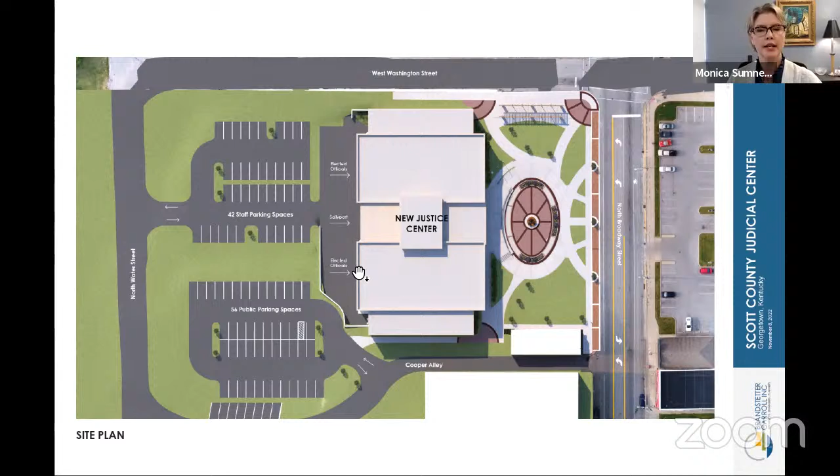One thing I noticed, which I think is just an oversight, is there's not a door from the right-hand elected officials parking into that hallway. On the other side, it's right there. On the other side, the other. Yes, correct. Gotcha, sorry, thank you. No, it's not a problem, there would be a door that mirrors the other side right into that staff hallway.

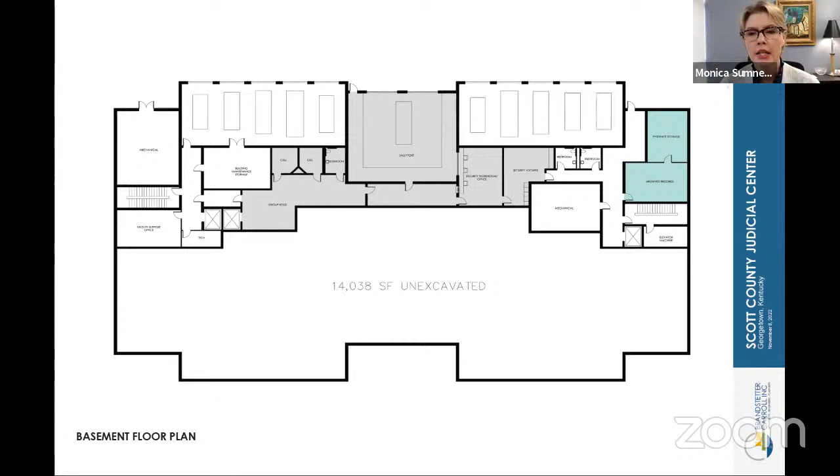And then the building is kind of divided into halves, which we'll see when we go to the first floor. So we have stairs on both sides of the building for staff.

So Jennifer, point to the right-hand staff stairway. That's a staff stair and elevator. And then over on the other side of the building is a staff stair and elevator. So we have two banks of parking that are directly underneath their appropriate courtrooms, and they come on up through the building that way.

Okay, so let's enter the front door, and I'm just going to continue to ask Jennifer to move her hand. So we have two entrance doors in the front just to get people into the two security checkpoints, so during busy times we can get people in. That little gray area is just circulation space or security space that is accounted for on the other document.

So straight ahead from the security checkpoint, folks can find the stair in the middle, or over to the right, a bank of elevators.

The clerk is in the green area, so people can easily find them to the right of entering in. We have a counter, all the workstations, records review, records, all of the things that we've worked through with Ms. Foster.

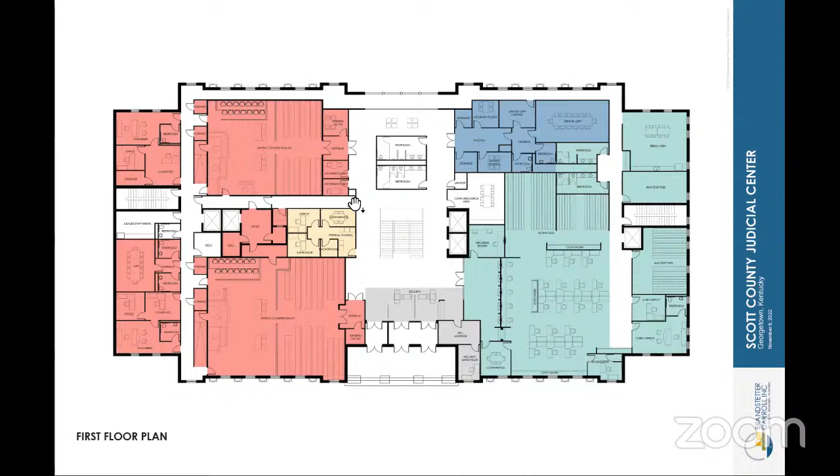Oh, no, I'm sorry. That is okay, I only have the allocated program in my hand, not the, okay. No, you're fine, let's take a look at the screen here together.

Thank you, I'm struggling, I apologize. This is one of those times where these are really handy meetings. I know they're a lot harder to schedule in person, but these do go really well in person too. We've been struggling also with just. Yeah, I know you have, Monica. Thank you, to get it across clearly is a struggle. It does, it makes it harder for you guys, so we appreciate it. To Zoom at all? Oh, we could Zoom it. Does that help everyone? Yes. Okay, because you never know what other people's equipment is like, if you're trying to do it on an iPad or a large screen. So there, thank you, Jennifer.

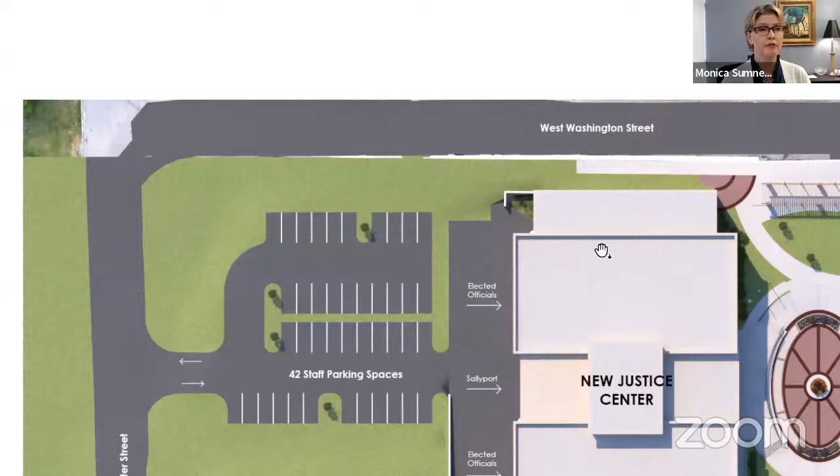Okay, good. Let's continue back to the first floor. We may have to zoom out just a tiny bit. Now let's zoom in. That seems good, we can move around a little bit. Okay, so here we're back to the first floor.

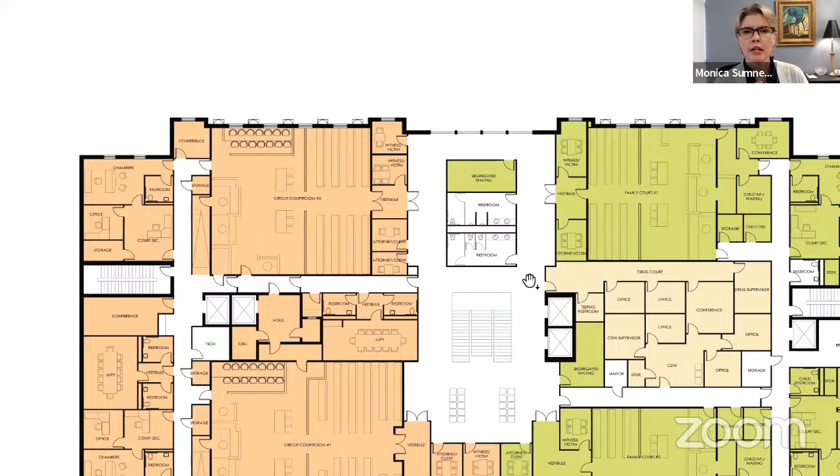Jennifer will find her place here. Whoa, we jumped right to the second floor. Sorry guys. The only area I really didn't point out on this first floor plan is the blue area to the back right, and that is the grand jury suite.

Jennifer, come back over, let's point out the staff circulation. So all of that is our private staff circulation pattern that flanks the building all the way around, so the clerk, judges, and staff can move about freely getting their job done without intersecting the path with the public or the in-custody.

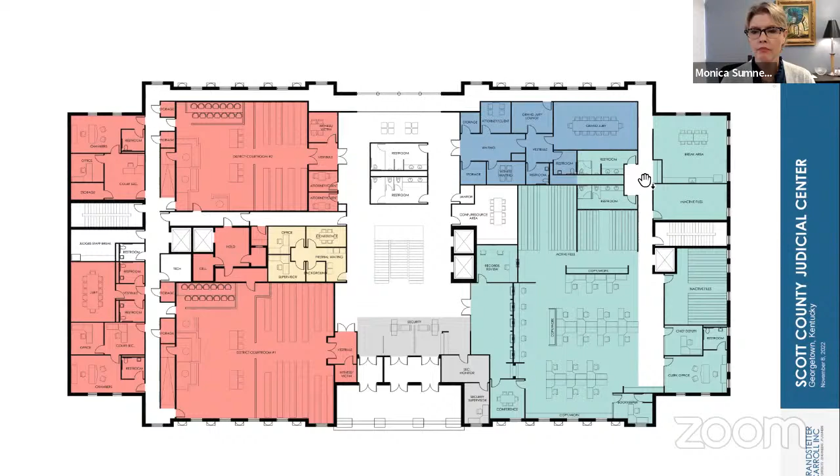All right, let's go ahead and look at that second floor. Here's the second floor plan. Wow, these colors are really bright on my screen.

So again we have banks of 2 courtrooms, where on the first floor we have the pink courtrooms, stacking above are these tan colored ones, and that is the circuit court. The circuit courtrooms are on the left with jury quarters and holding in the middle. Then to the back, or the left, we have another jury room, because circuit court wanted to maintain 2 jury rooms, and then the accompanying chambers for each courtroom.

Over on the right-hand side of the building, which would be above the clerk and the grand jury, we have family court. The one Jennifer's highlighting now is closer to the authorized size, and the other one is a little bit larger per the request of that judge. Behind those 2 courtrooms, same thing, we have the supporting suites so those chambers can be right behind their bench.

And then in the middle we have statewide services again. We have drug court and CDW with distinct and separate entrance points. Drug court enters in off of the main lobby, and the CDW suite is accessed through a semi-private or controlled corridor flanking family courtroom number 2.

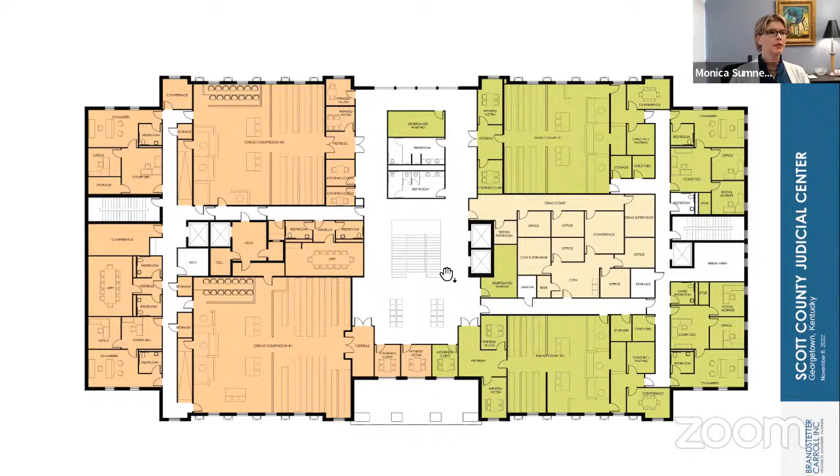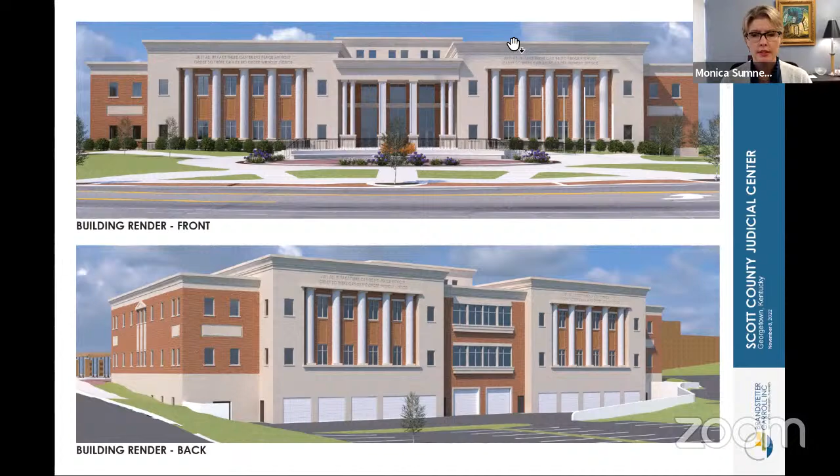You guys see me okay? We do. Thank you, Stevie.

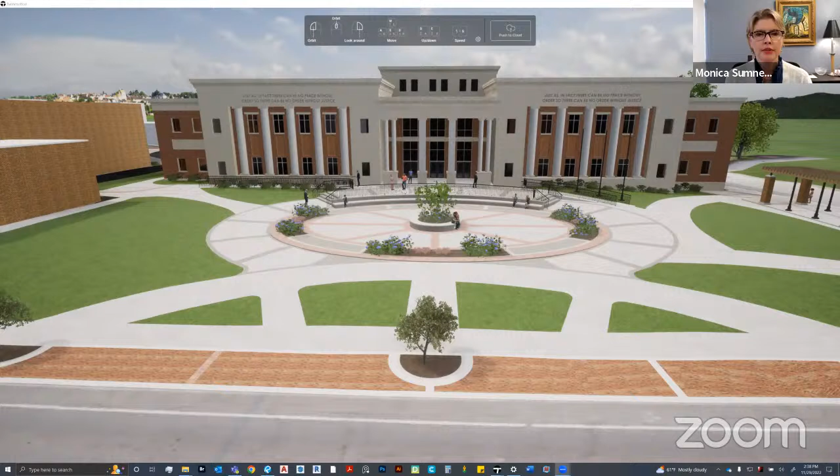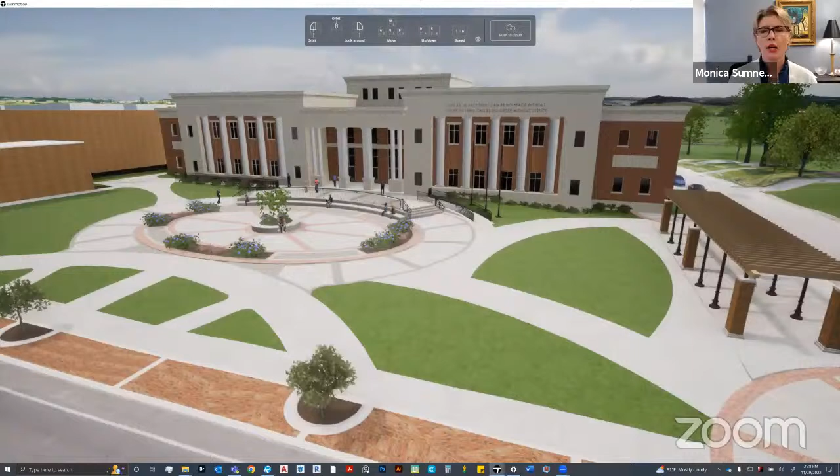So Stevie, you can just start moving slowly and I'll narrate as you move around. Here's a nice view of the public plaza with planting areas and seating and so on, addressing the parking along the street. I'll add that we're probably going to get a little bit of lag and choppiness.

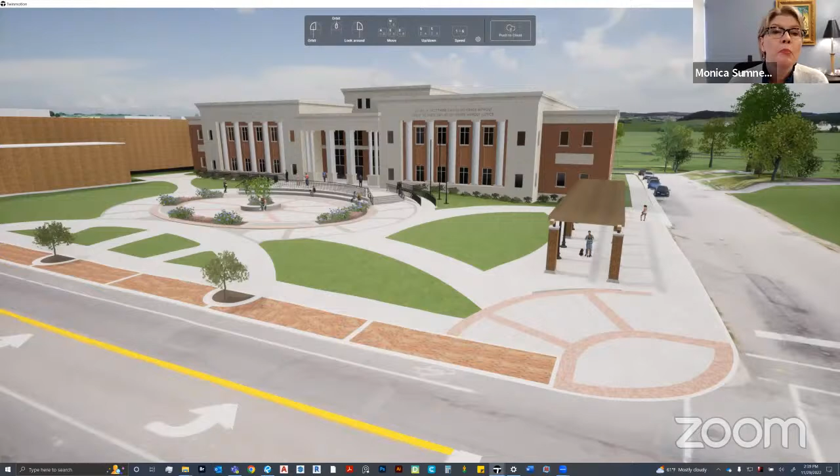Just because of the way we're doing this with Zoom, but we can get a little spin, a little feel of the surroundings of the building and of the site. We can go down the side street and look at the side view. More lag than I would have anticipated. There we go, so you can get a feel here for how the site falls off, which is why we have that partial basement in the back.

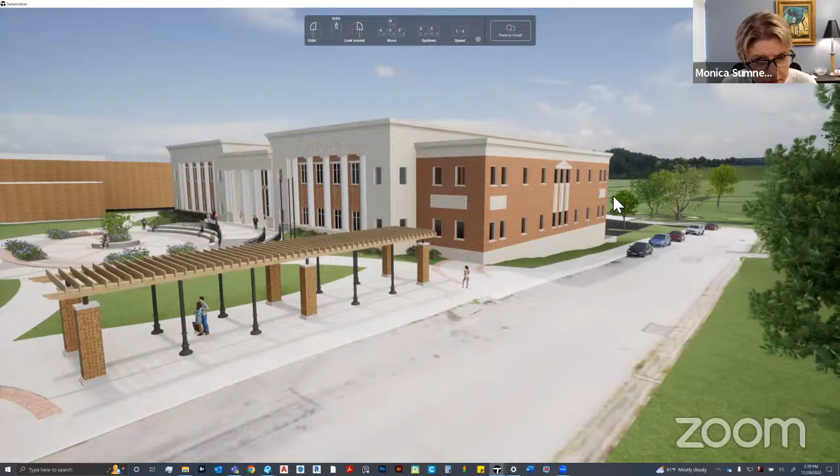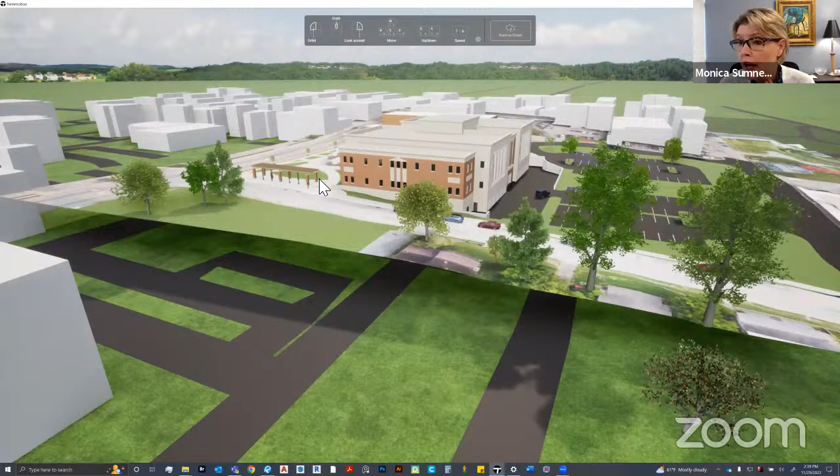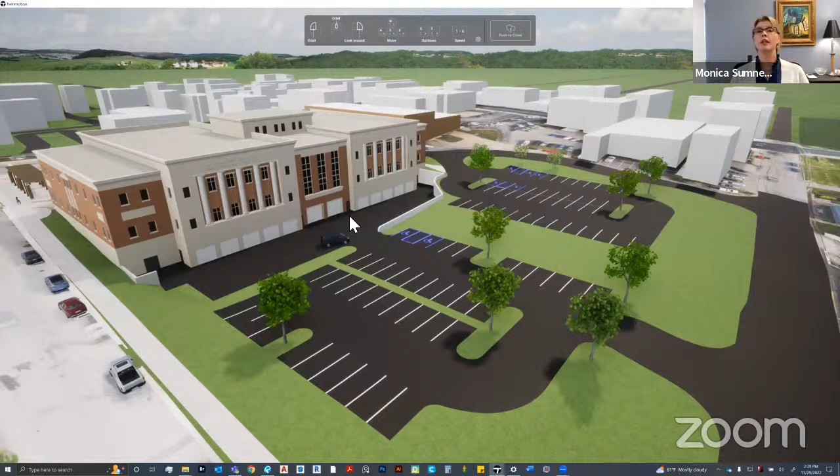So the areas of the building that appear to be taller in the stone, those are where the courtrooms are located, and they do have higher ceilings. The lower side pieces in brick, that's where the offices and chambers are. They can still have a very nice ceiling height, they just don't need to be as tall as the spaces the courtrooms need.

So you can understand how the building is arranged by looking at this building and seeing the tall stone pieces are the courtrooms. You see the garage doors there around back and how they feed into the parking areas. This lower level in the foreground is the staff parking, and the parking lot farther away from us is the public parking.

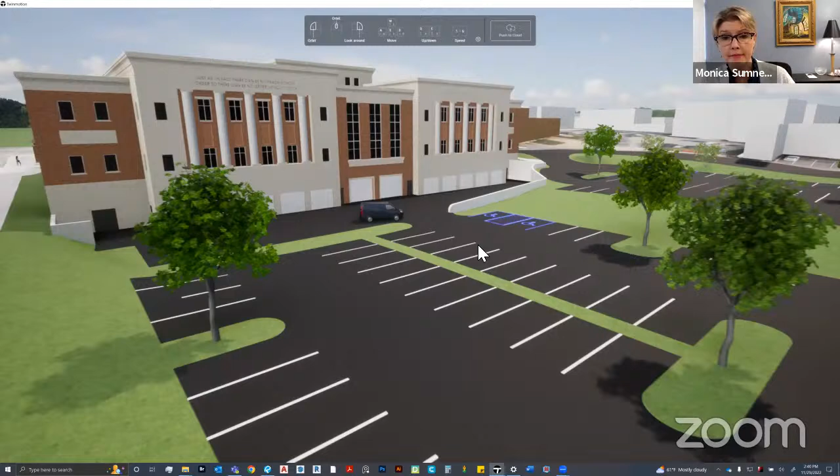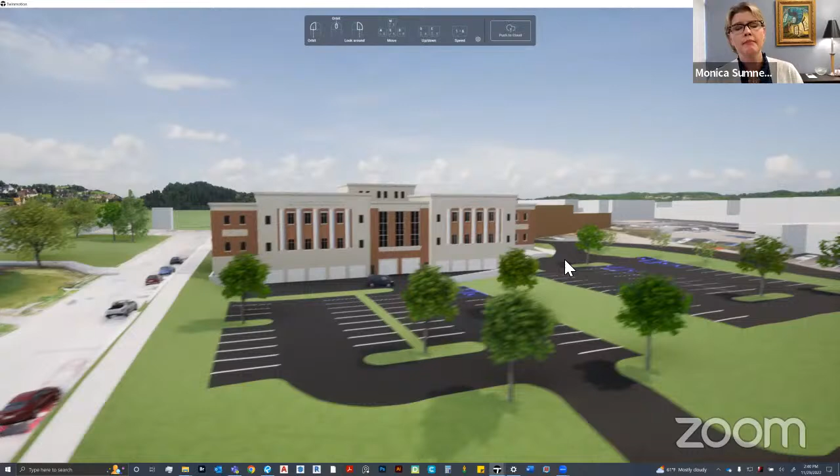The two garage doors in the middle in the brick area, those are Sally Port entrance points. We may go to one door, we may leave it two. We have a few tiny decisions like that yet to be made, but ultimately that's the location of that door or door set. The tall part in the middle of the building with the clusters of windows, the high part, that is over the grand stair in the lobby, so we'll get some natural light down into the central part of the building.

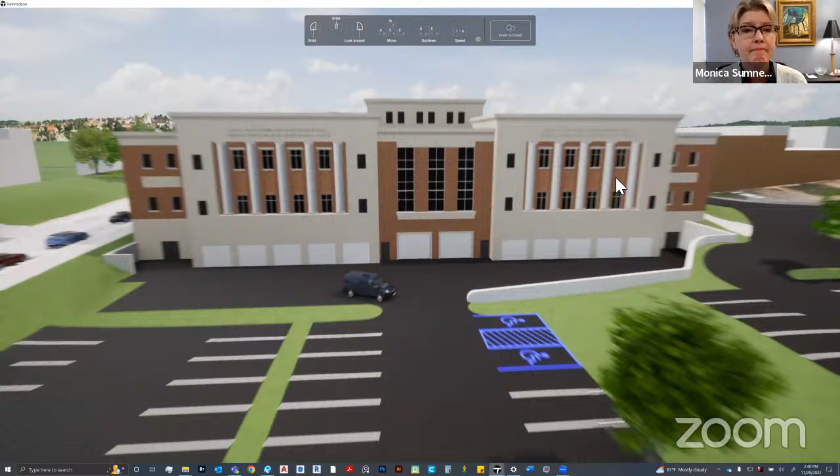All right, and Stevie can just work his way around the other side of the building and land us back at the front. And we can entertain more questions about the building, or we can move on and let the construction manager speak his part.

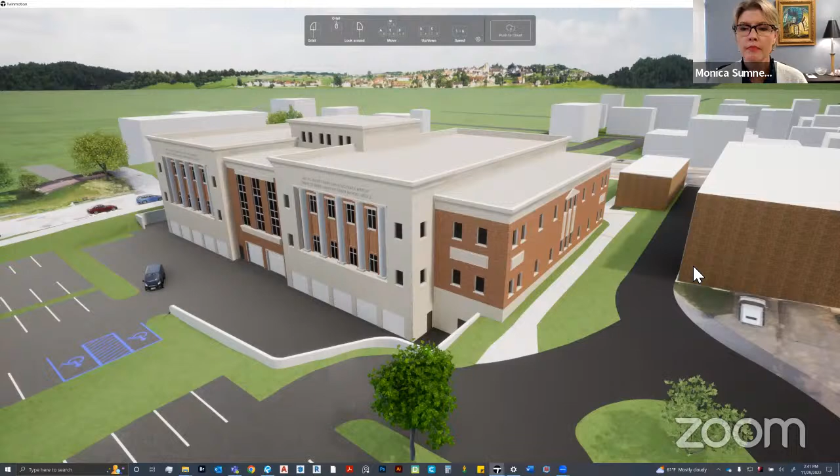I just have a comment. I'm from Scott County, so I'm looking at this with a little bit of additional interest than other people may be. And so I think it's a very nice facility, and I hope it works well for the judges.

Great. I know the project development board is very proud of it, and they want to break ground tomorrow. It's a beautiful facility, and it's a great location too, I think.

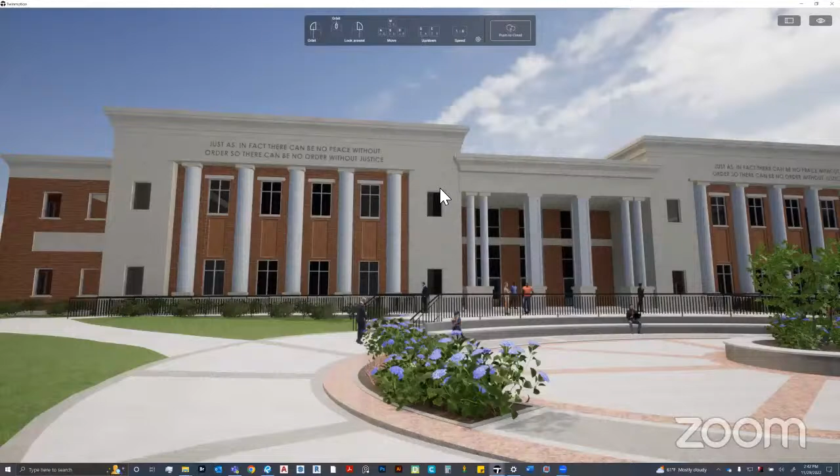And it looks like, and you may have said this and I missed it, is the ADA ramp right there in front of the building? Is that what that is, for the public coming from behind? Yes, it is. Okay.

Where are the closest handicap parking spots? How far are they from the front of the building? So we're actually going to work with the city to get a designated handicap parking space on the street, and there will be an accessible path to the front door from the street.

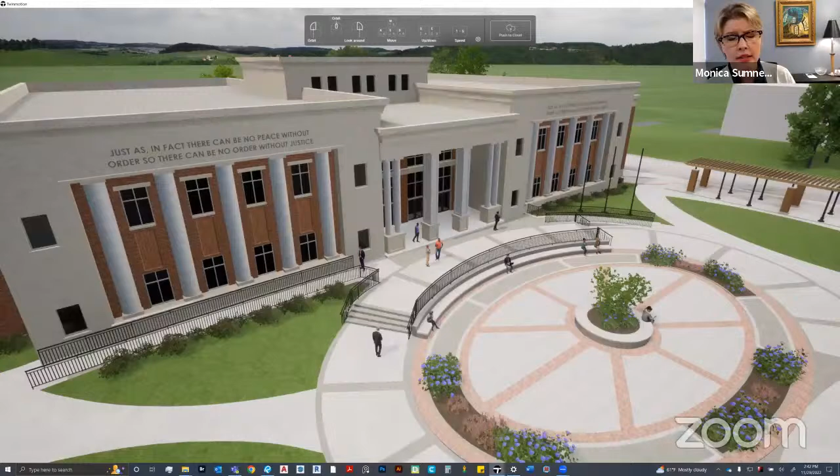But if we look at, Stevie, try to give us a shot of the parking lot in the back if you could, and focus on this left side of the building. We have an accessible path. You see a sidewalk there down the left-hand side. Whoa, I just lost it. There we go.

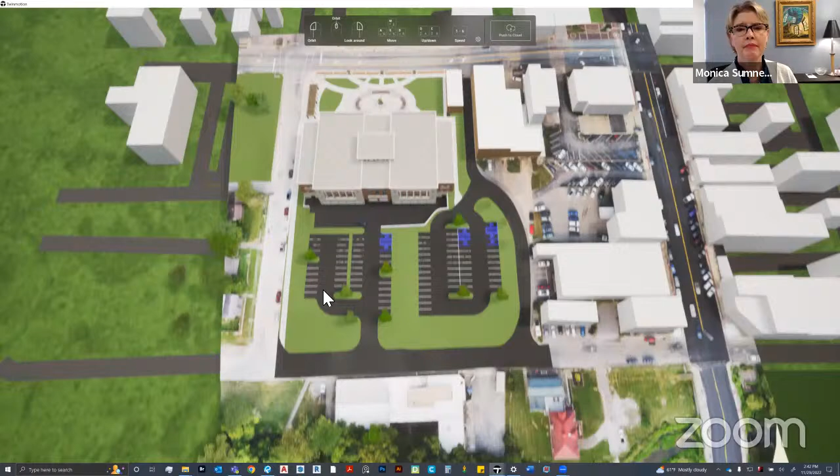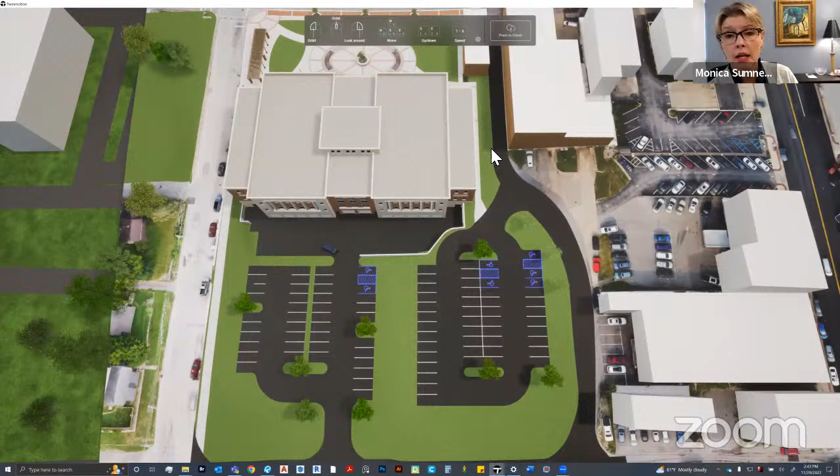All right, so there we go. Yeah, so on the right-hand side of the parking lot, you see the accessible parking spaces noted in blue. And then there's a sidewalk that connects that parking lot all the way around to the front of the building. Now it's not the shortest path, but we've designed the site to where it's nearly flat, so it will be easy to navigate, even though the distance is a bit far. We meet the ADA guidelines with that path.

Thank you. You're welcome.

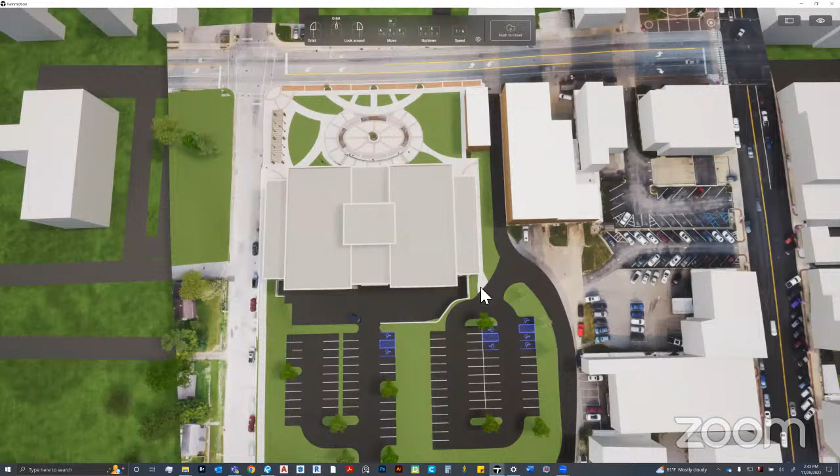So while Stevie has this view on the screen, it's actually a good one. You'll see in the top upper corner of your screen, you get a glimpse of some brick pavers, and that is actually the current Scott County Courthouse. And then the judicial building kind of makes a triangle between the courthouse, this new building, and over across where the big parking lot is.

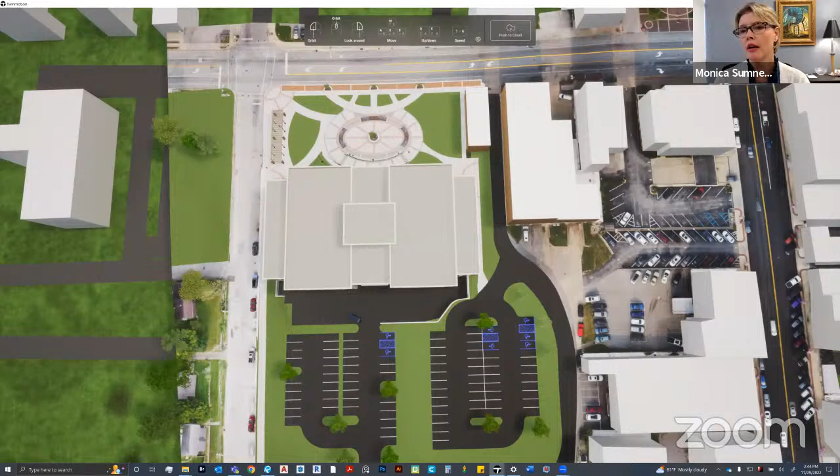So this building is really nicely located in the heart of the city. Not only will it have a good recognizable address, but it's easy to navigate. There's lots of parking around it, easy to walk to from restaurants, if you're there all day and need to run to a sandwich shop, there's plenty of offerings nearby. So it is a very good site for that purpose.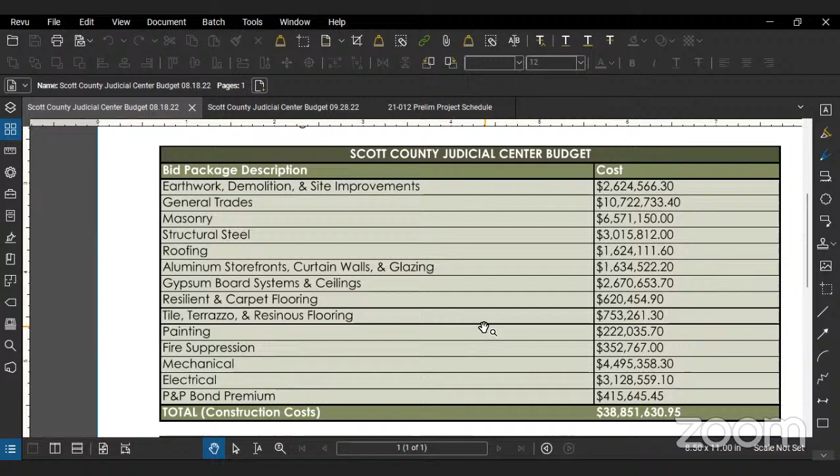Is there any specific questions or comments you'd like to expand on for any of the trades or GMP costs? You know, Josh, this is Lori again. I know that we've got to spend some time talking about this. I know at the last CFSC meeting before these projects were approved, we've been battling just the skyrocketing construction costs, just like everybody else is.

And I didn't know if we need to talk about that here, Danny. I didn't know if you wanted to hold that because the conversation is really the same for both projects. And Josh, I didn't mean to kind of mess you may want to.

Oh, no, no, absolutely, because we have a plan. Yeah, I think it'll be helpful that once we see the proposed plan of finance and related to these costs and what current interest rates are, or what we're seeing projected interest rates, I think it would be good to have that conversation probably then.

Okay, that works. I just wasn't sure what the plan was. Okay, yeah, I know. I believe the biggest concern, along with the market continuing like it has, is the interest rates. So I know that's been a big concern.

Josh, one question I will ask of this related to the total construction cost, which includes the construction management fee. Also, but where are we as far as the total square foot price per square foot related to the square footage that we have on the design?

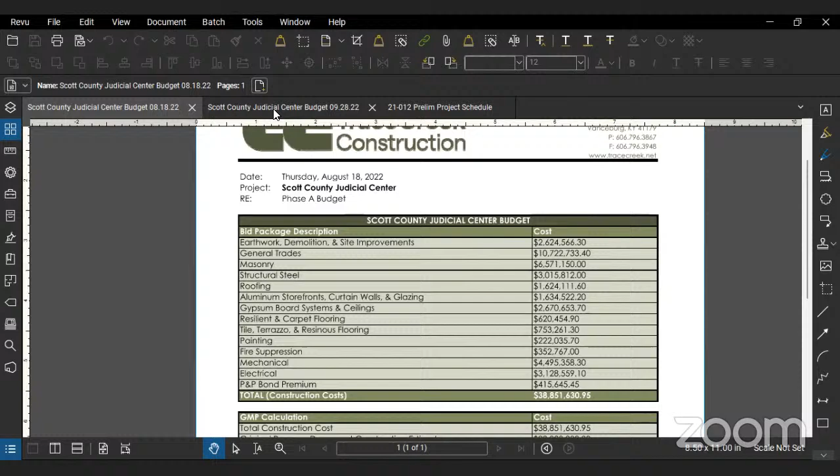Any other questions from the committee? Now we did break out the site demolition package, which we are currently out for bid for. That would be included in the $2.6 million line item for the earthwork and demolition site improvements in the overall budget. It's just broken out of that line item. This would include abatement of the 12 structures that are on all the properties currently, the removal of those, the trees and vegetation, utility cutoffs, and kind of some preliminary grading, along with a post-driven fence, kind of get the site ready and secure until the project keeps moving forward.

So, I do have a question. This is Libby. Is the 10% contingency the traditional contingency? And do you feel like that's sufficient at this point, just seeing how the costs continue to increase? I just wondered if you could speak about that.

Historically, that's what we've tried to run with, is 10%. On this project, we'd be looking at a little over 4 million for any overruns or modifications or changes in work.

So let me try to address this, because Libby, I feel like you're asking the question I'm asking. So when we talk to the financial advisors about the cost overruns and where we are on the use allowance, spoiler alert, I don't think anybody will be surprised, we're going to have to go back to the General Assembly on these. But in terms of a 10% cost overrun, that's really based on whatever the costs are. That's not based on projected material cost increases or labor costs, because we probably need to explain to Libby once it goes out to bid where we are.

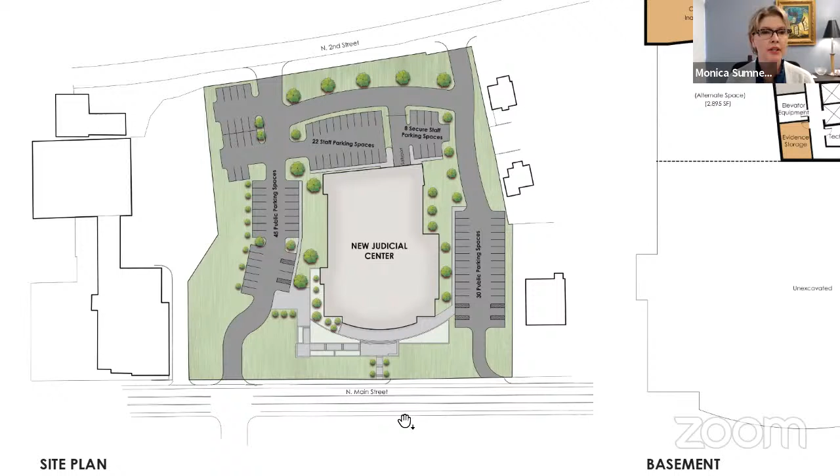All right, this is a site plan. And County Judge Executive West noted how lucky they were to find this property. I support that. To the left of this judicial center, the building on the corner highlighted in dark there, that is a prominent bank in the community right on the corner.

The courthouse is about a block to the left of that, so it's very proximate to diners and attorney's offices and whatnot.

So the Judicial Center is labeled there in the center of your screen. We have 2 entry points onto the site, with public parking flanking the building. We're trying to maintain an appropriate setback and lawn to the front of the building, and we've noted staff parking and secure staff parking spaces in the back.

There's also exit points out to North 2nd Street. So we have excellent site circulation with this property.

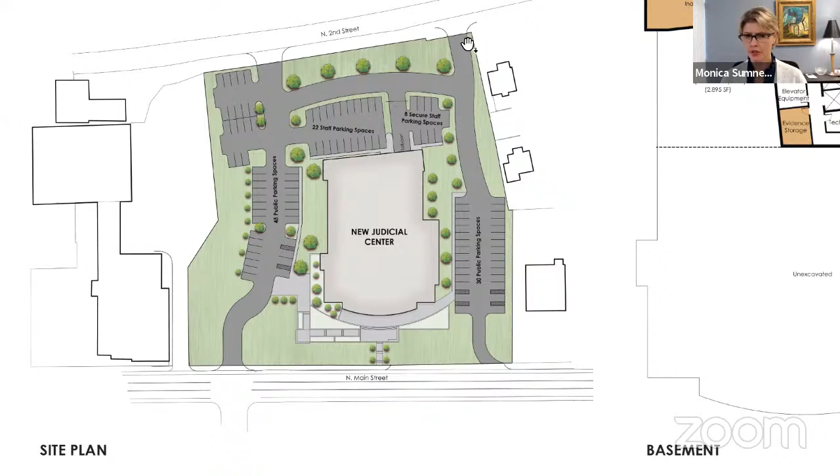We do have a partial basement again because we have rolling landscapes in Kentucky, as you all know, so this site is not flat. In fact, we have a 14-foot fall from the front to the back in height. That allows us to sneak in a sally port and some storage and support spaces underneath the building.

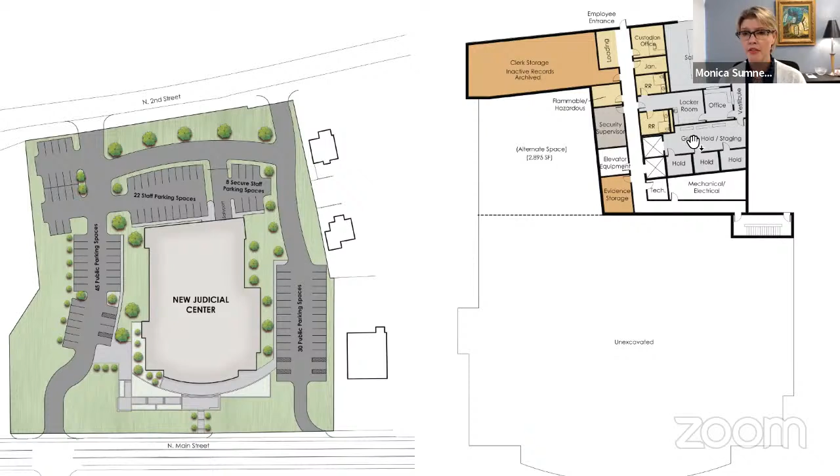The sally port and prisoner holding and handling areas are in the gray colors, and those tan and brown shades are various support spaces, such as storage for the clerk, long-term storage records, custodial offices, various equipment needs, and so on.

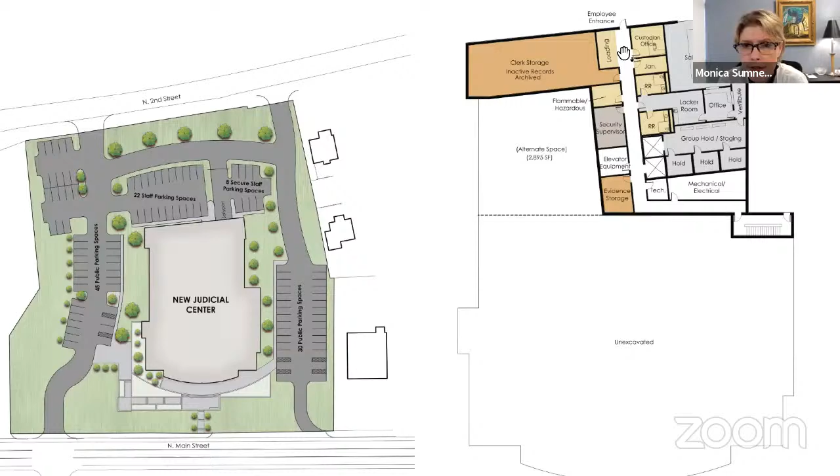It's labeled law enforcement door in the back there, Jennifer, the back corner, right? We do have a place where the staff will enter there and law enforcement personnel can access. And then we have another staff entry point right where the employee entrance is, off that back staff parking lot. So we've got secure entrances in the back, no public entrances back there, all the public entrances in the front. And we'll show you that on the first floor plan next.

All right, let's just get that first floor zoomed in on, Jennifer, if we can. All right, so we have front doors. This plan is kind of long and narrow from top to bottom, so we'll have Jennifer adjust that plan for us as we move through. We have 2 entry doors that she's highlighting with her hand there, and we come into a nice open lobby with a security checkpoint.

Those dash lines represent soffits or elements happening on the ceiling, so they're not really there on the ground plane, but they help form the space. The clerk windows are highlighted in the bronze, dark tan color. We have the record review noted, all the desks and windows that the clerk has asked for. The clerk office is shown over on the right with all of his support staff, records, and so on.

To the very front of the building, just past security, we have our pretrial offices shown right there. And then over to the left on the far end of the lobby, we have our stair that goes up to the 2nd floor. That stair does not access the basement—there's no basement under this part of the building.

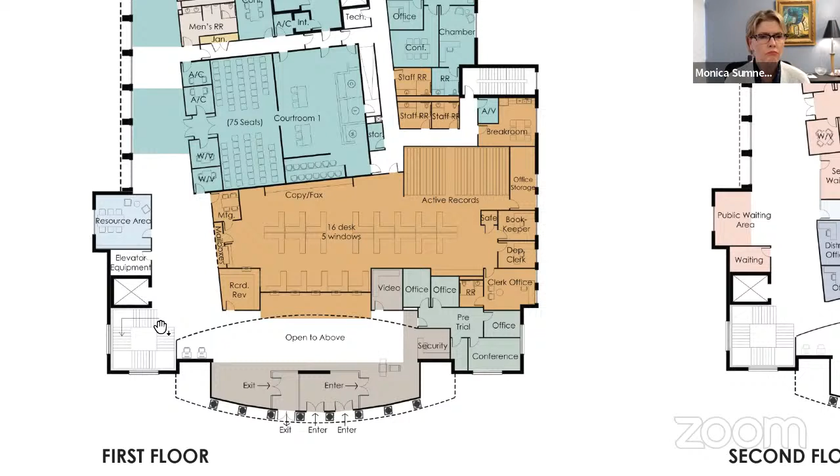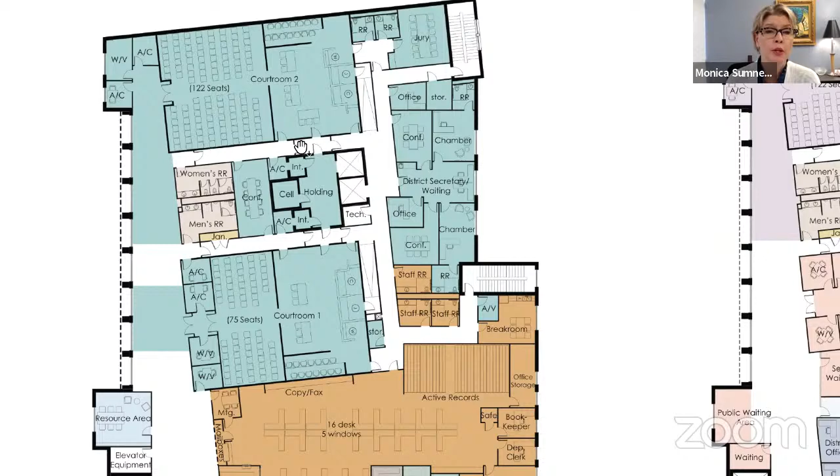As we move back toward the corridor, if you can slide your plan down, Jennifer, these green areas are all of the courtrooms, as noted, courtroom 1 and courtroom 2. The intent by the judges in this county is to use the larger courtroom, courtroom 2, for things like traffic in the district setting, and courtroom 1 is a little bit smaller but still meets the program space nicely.

The nice feature about this corridor, on the left-hand side, you'll see some black squares and a dashed line. You'll see that when we show the facade of the building—that is a large glass wall with a sunshade and a colonnade. And that's going to be a really nice feature for this building.

The green spaces behind those 2 courtrooms are chamber spaces. Though we are showing corridors running adjacent to those courtrooms, I believe Ms. Anderson commented about that. We do have direct doors behind the bench that the judges use, and they will not be utilizing those corridors. It's hard to see on these plans, but we have direct doors into those courtrooms for the judiciary. The holding space and those doors go directly into the courtrooms as shown.

We have jury quarters in the back corner of the building, and it was the desire of the district judges to share a jury deliberation space for these 2 courtrooms, although they're sharing holding, right there in the middle. We also have a stair in the back corner. Staff can utilize that stair along with another one in the middle of the plan. Those are private, secure staff vertical circulation through the building.

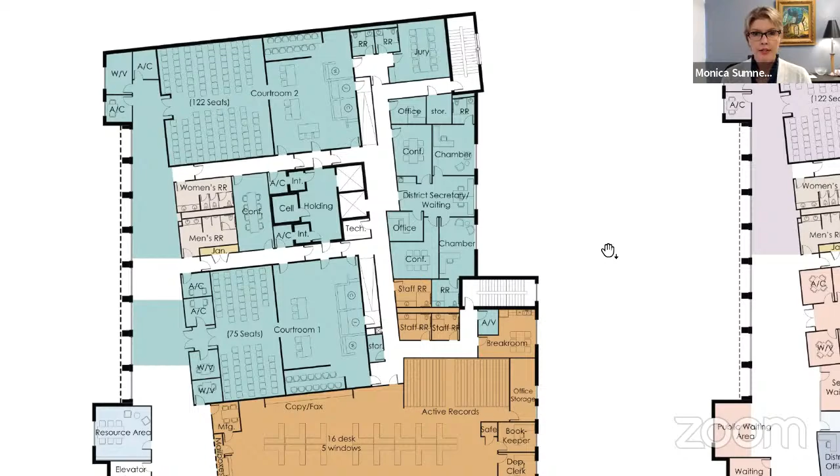All right, let's look at the second floor plan. We have a large public lobby space that's open to below, so there is not a second floor there, just a tall lobby space, if you will. The yellow area to the right is grand jury space.

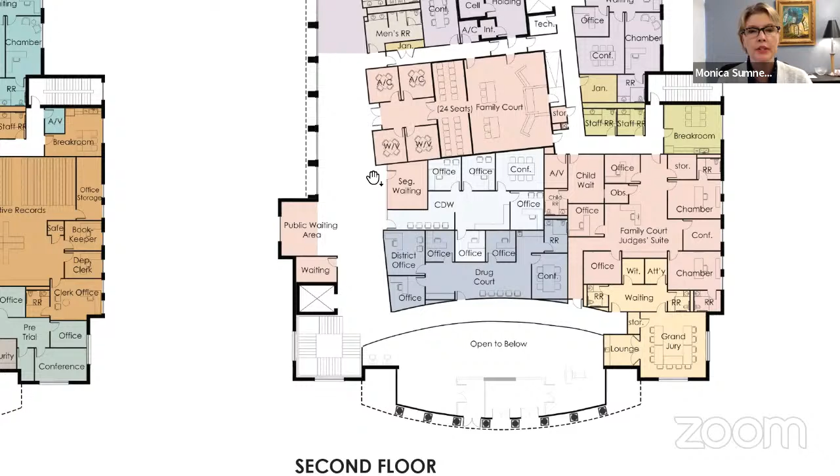We have a drug court entrance right there, and the gray area is all the drug court offices. We received a request to add a district office in this drug court space, and we've done so. Over in the hallway on the left, which is the main circulation corridor for the building, that's where we access the family courtroom. Family courtroom is right there, and we have all the matching color spaces in the lower corner to the right—it's all the family judges suite, 2 chambers, supporting conference space, and staff spaces as required.

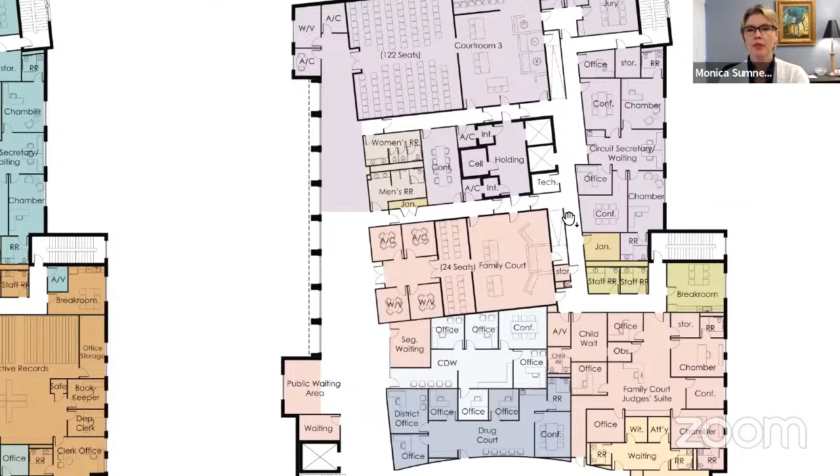Right outside of that suite, we have staff restrooms and a break room. Behind those 2 courtrooms, the area left white is the private staff corridor, and on the left of those courtrooms is the public circulation. The colors match the pale lavender shade of courtroom 3, and all the support spaces for that are in the same color, including the chambers behind the courtroom, where we have 2 chambers sharing a common space, conference rooms, and staff support spaces.

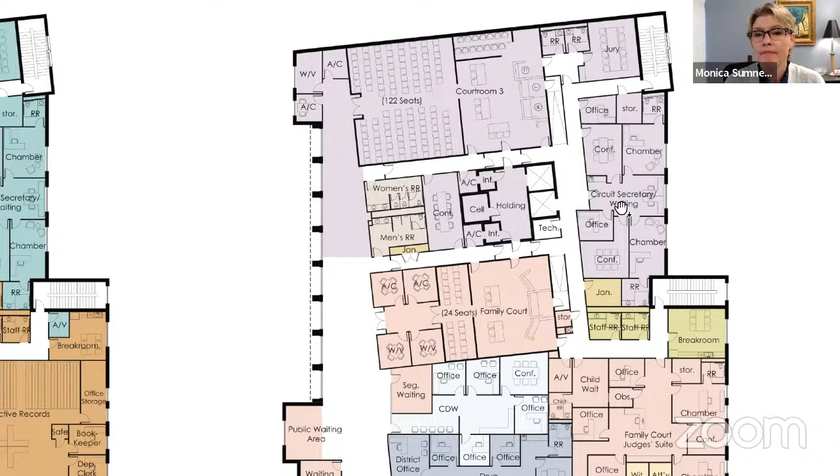All right, I believe that summarizes that second floor. That was quick.

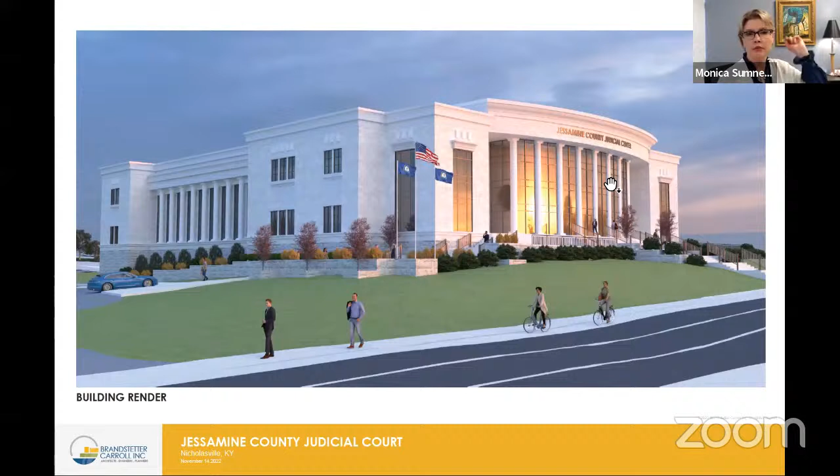Let's take a look at our presentation of the building. You see how the curved front colonnade presents itself to Main Street. Then the colonnade on the left, which is straight, is the public corridor that runs in front of the courtrooms. The other smaller window openings are in various support rooms and spaces.

All right, hopefully Stevie didn't fall asleep. He was waiting a long time. I'm here, I'm sharing now. Thank you.

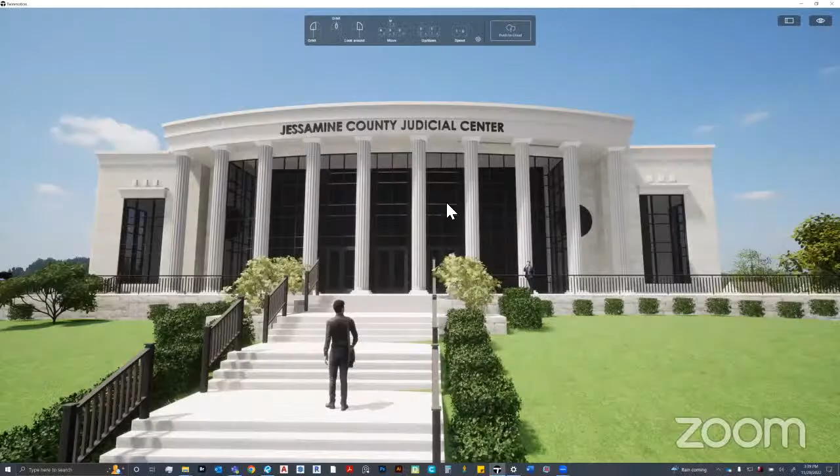So this is a 3D model we've constructed of the project. If we were on a large screen in front of you, we could do amazing things to fly around this building and let you see all the architectural components and details. Stevie will do the best he can to move us around—it will be a little choppy, but you can get some perspective on the stature of the building, which is very important, as well as the site positioning and so on.

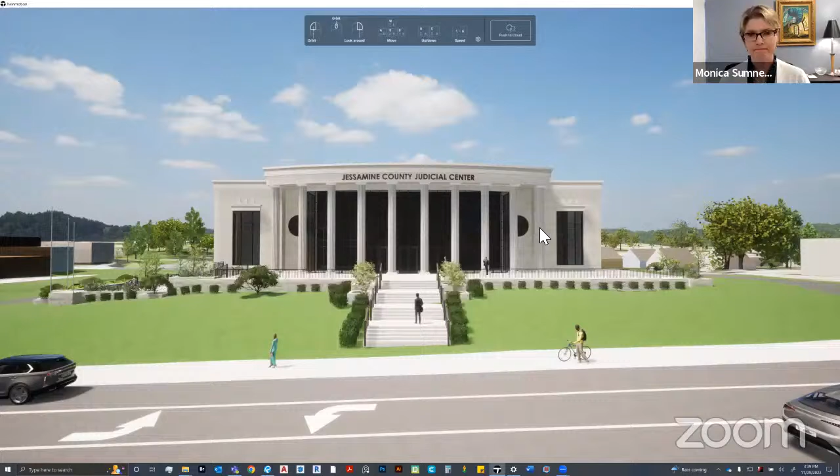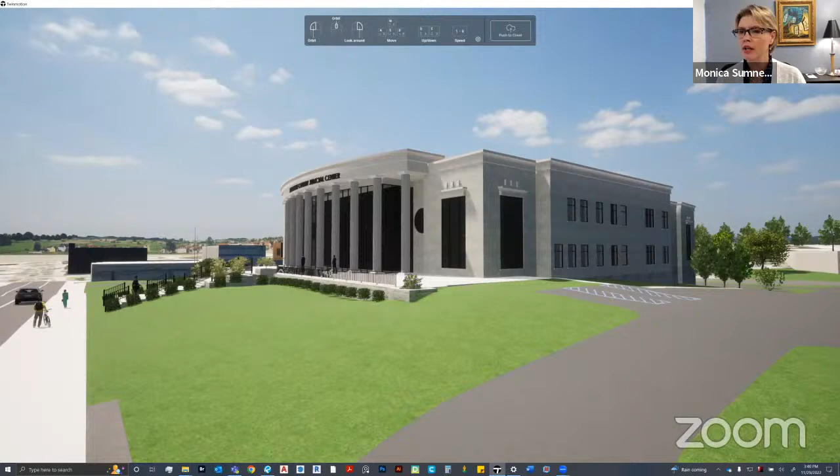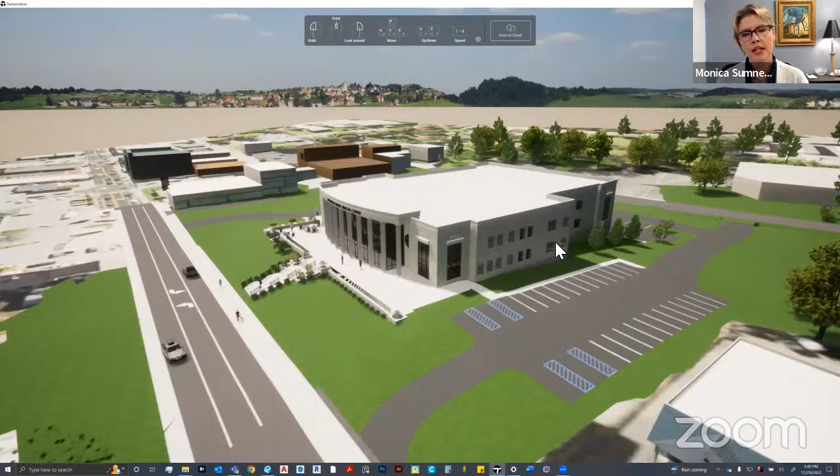Good. So we're standing across Main Street, looking directly at the front of the building. If we can move around—right, there we go. We have public parking directly here on this side. You can see some handicap spaces marked, and we have a nice at-grade entrance directly onto the front walkway and porch area of the building. We haven't necessarily completed the design work on that concrete flat work, but we'll get to that quickly to tie the parking lot and front porch together a little better.

The side of the building just has a nice rhythm of windows. You can see how the site falls off dramatically toward the back, so we've taken advantage of that, getting our inmate delivery into the back of the building, around the bottom. We'll let Stevie take his time and get us around to the other side as he can.

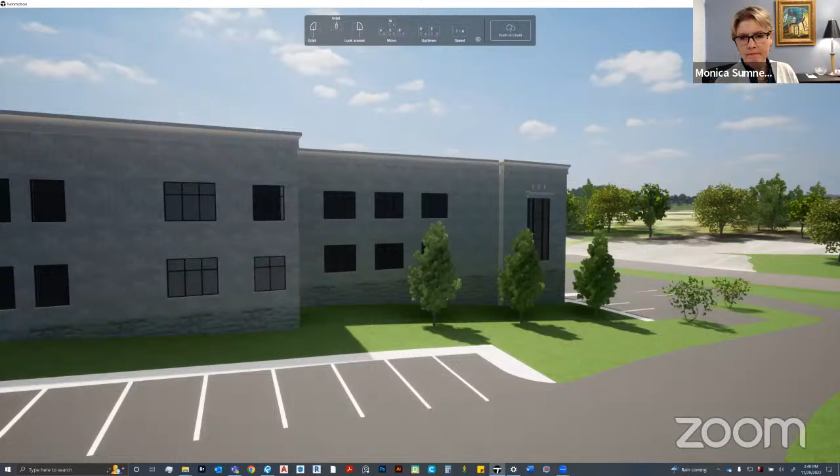We were very fortunate to have a nice roomy site. We have filled it, but there is enough space for some green areas and trees to make it visually appealing. You see the Sallyport door there at the bottom. We are not showing the man door reflected on the floor plan, but there would be a direct walk-in entrance down here from the staff parking lot.

And it'll keep moving here in just a moment.

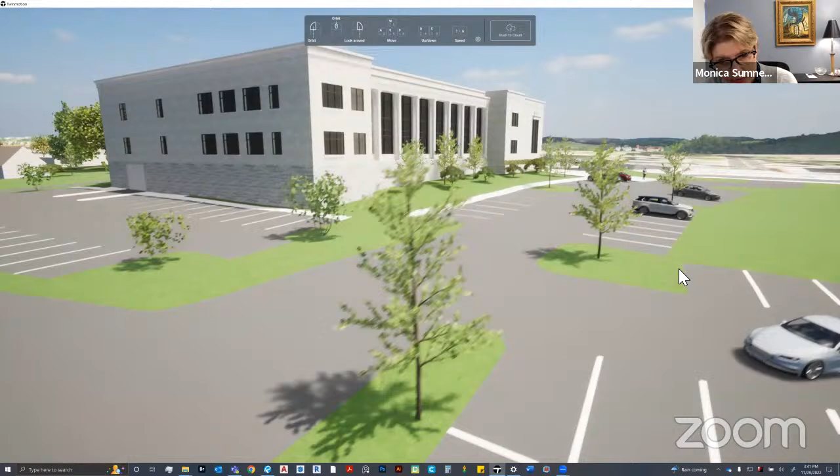So all of this parking that you're seeing along the side of the building is public parking, and you see the colonnade. The colonnade adds a nice touch, it sort of matches the front, if you will, and makes a nice aesthetic presentation to the community.

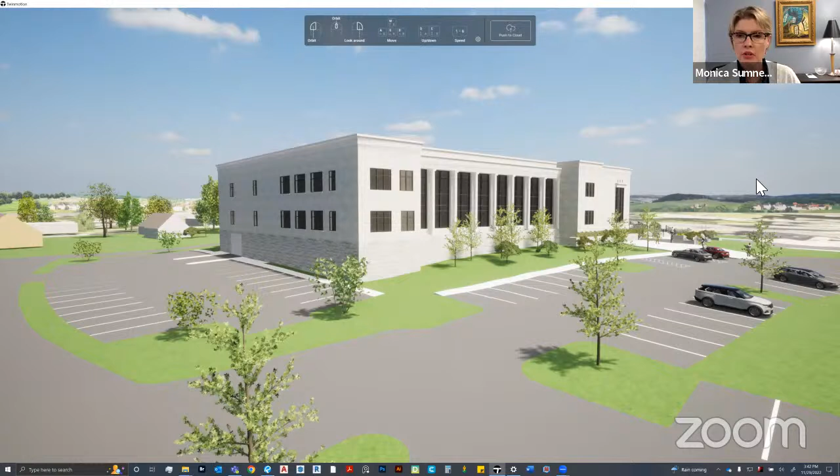All right. And Stevie will get us back up to the front, and we'll wrap this up. And there we go.

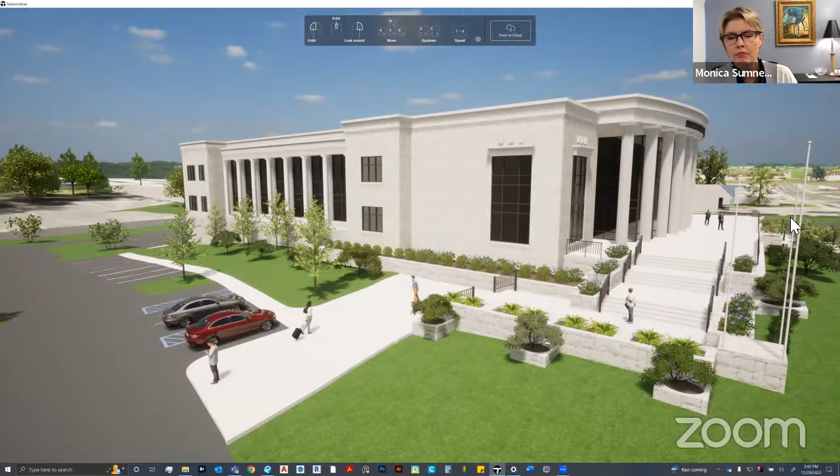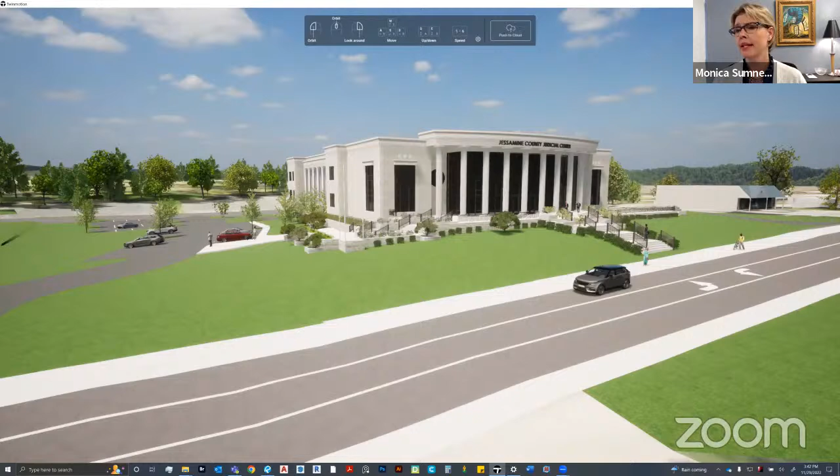We have a lot of potential with this project to make this plaza very interesting. There are a lot of stairs on the left side, but none on the right side. So we were fortunate to be able to have ample public parking and also maintain an at-grade entrance for those with handicap needs.

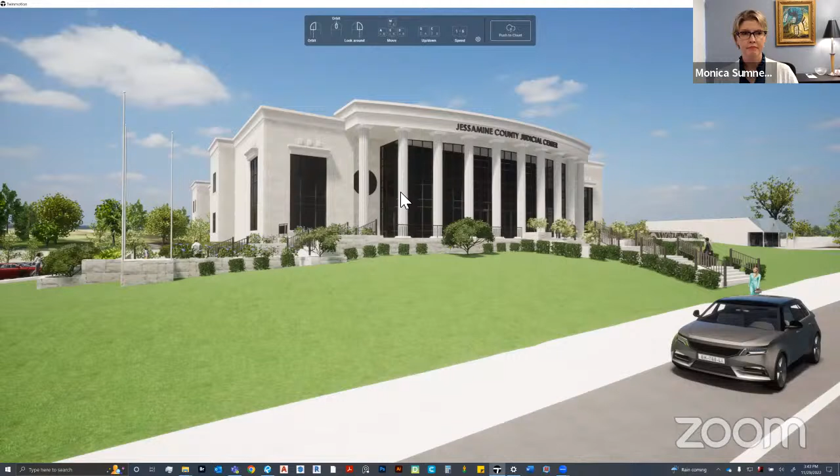Okay. All right, that's all we have for that. Thank you, Stevie. And we can, let's see, Phil, there's Phil.

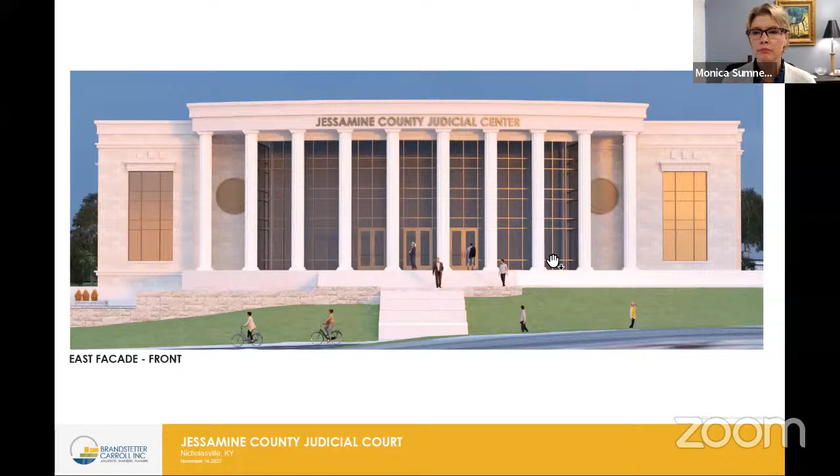Phil Schilfarth is our project manager on this project, and he is going to walk us through budget and schedule. And then our financial advisor is here, and they can roll into our budget talks, which won't be very different from the Scott County conversation, unfortunately.

Thanks, Monica. I would agree, the schedule cost comparison probably has the same points of conversation as Scott County as well. So pending approval and everything moves forward, we were looking at phase B completion in about 4 months at the end of March. Phase C completion would occur towards the end of September, which is about a 6-month process.

And then we go into quality control, agency reviews, and permitting. That's about a 2-month process, which gets us to the end of November. Over the following months, we would advertise for general contractor bids and answer questions, issue addenda and things of that nature, followed by construction beginning in February and concluding in August of 2025, about an 18-month process.

And so this closely mimics the Scott County schedule, with final completion being around October of '25.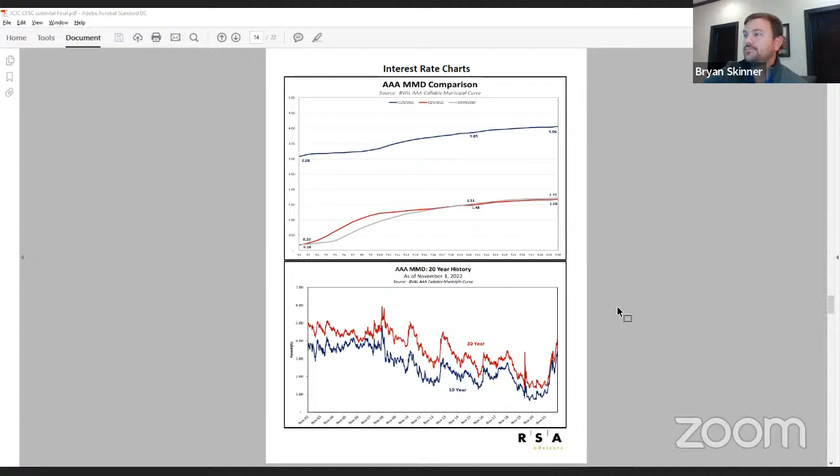This is going from year 1 to year 30. You'll see that we're very, very low. These are based on a AAA, so we benchmark to this. Interest rates are very low. A year later, on 11/1 of 21, basically a year ago, we were still incredibly low. And earlier this month, like I said, it's come down a little bit, but we are significantly higher, more than double the interest rates at every point in our yield curve.

Where I mentioned that the yield curve is flat, right now, if you look at year 20 at 3.85, going out to year 25, that interest rate doesn't go up a lot. So your overall interest rate would not change that much. Of course, you would pay more interest paying it over a longer period of time, but a little different than in years past where our curve was not as flat.

It doesn't penalize you as much to go out that extra 5 years. The bottom chart is more of a history of our 10-year rate and our 20-year rate. You can see right here, historically, these rates are not crazy. We've just been spoiled the past couple of years with these interest rates.

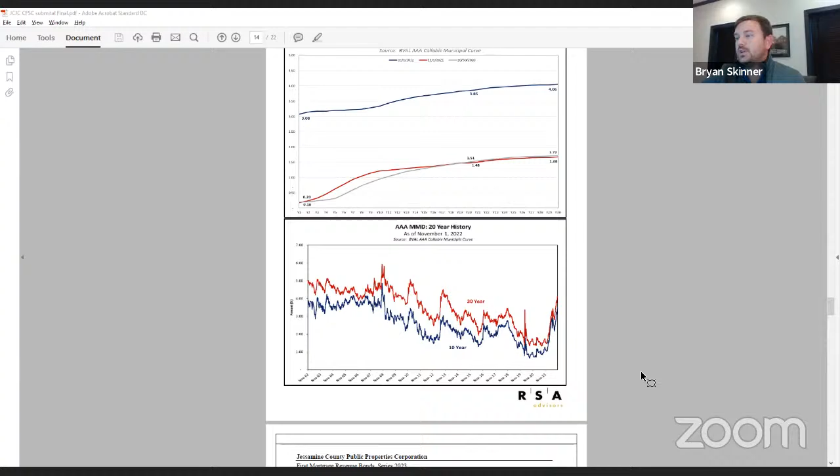The rest of this is just some supporting bond schedules, but really the crux of it is here and on the bottom of this page. So if we have any questions or discussions, me and Joe can try to answer.

This one, everybody, what you're seeing is right - this one is even, I hate to say, in a little worse shape financially than Scott County was. I'm struggling just a little bit because it is so small. I'm not sure if you're able to enlarge this at all.

So the bottom line is at 20, even at 25 years, we cannot come in at the use allowance. And Danny, I know we've got some issues on the square footage calculation also. I don't know if you want to bring everybody up to speed on that.

Yeah, I had this moment. Danny, hang on one sec too, because we've got folks here - this is their first or second CFSC meeting.

I think it's important to even speak to the Phase B billing, because again, I'm worried about making sure we can pay our contractors through the bond anticipation notes. I am hopeful that we are going to get financing for these projects, especially for Jessamine, because we've got to go even 25 years, we've got to have an additional appropriation. So I just want to make sure that as we proceed through Phase B, that we're going to have enough to pay Phase B, because if we don't get to Phase B approval, say for some reason we strike out at the General Assembly, I don't want folks to have bills that aren't paid. So Danny, I'm throwing all that out at you.